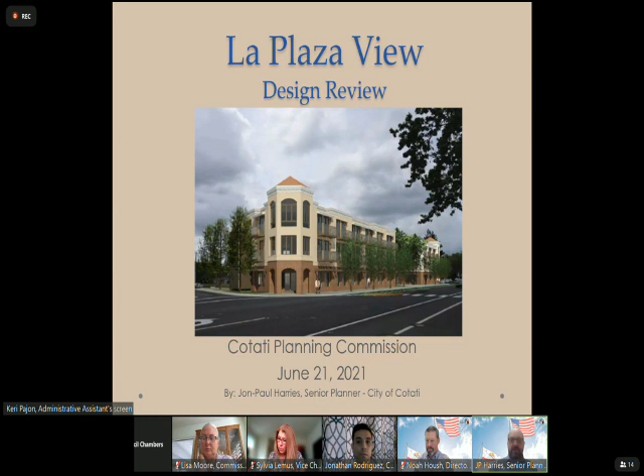The plans begin on packet page 50 if you want to review them as we go along. The project consists of 2 three-story mixed-use buildings, generally commercial on the ground floor and residential on the second and third floor. However, building 2 also includes some residential on the ground floor. Building 1, the more western of the two buildings, would have 6,992 square feet of commercial floor area, with 12 residential units: 10 two-bedroom and 2 one-bedroom units, 6 on each floor.

The building itself would be 35 feet high to the top of the parapet, and there's a tower at the corner of La Plaza and East Cotati, which also forms part of the roofline, reaching 43 feet tall at its peak.

Building 2, we're looking at 2 floor plans. Originally, the applicant proposed a floor plan with 1,271 square feet of commercial floor area and 17 units. We asked them to amend it, so that there's 3,391 square feet of commercial floor area and 15 units. 3 of those units would be on the lower floor; they were originally proposing 5 units on the lower floor. Like building 1, building 2 is 35 feet in height to the top of the parapet, 43 feet to the tower.

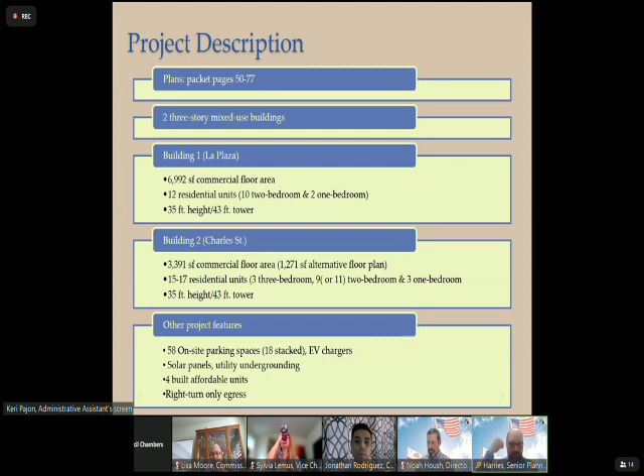Before we go on, let's just continue. Next slide, please.

Some background on this property, because some of this project will look familiar to some of you. The site's been vacant since 1965. In 2009, though not related to this project specifically, the City Council adopted the downtown specific plan in August of 2009, which established zoning and design requirements for the downtown area, calling for 2 to 3-story mixed-use development in this area.

The DSP establishes a building height limit of 35 feet. That's the maximum height, plus you're allowed to go 8 feet above that for things like towers, chimneys, or architectural features.

Following that, the general plan update was adopted in March of 2015. The general plan within the downtown area just reiterates the DSP goals and objectives and encourages development and revitalization of the downtown area.

This project originally came to us back in 2017, and it was a 2-story project back then with 12 residential units. Same kind of architectural design, 2 buildings, with the same mission commercial Main Street kind of look, but with only 6 units in each building.

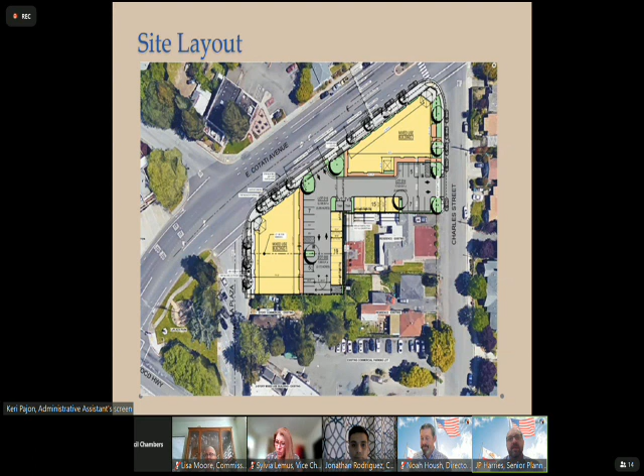Next slide. Here you can see the zoning. It is located within the DSP. It also has medium density residential around it, as well as downtown commercial.

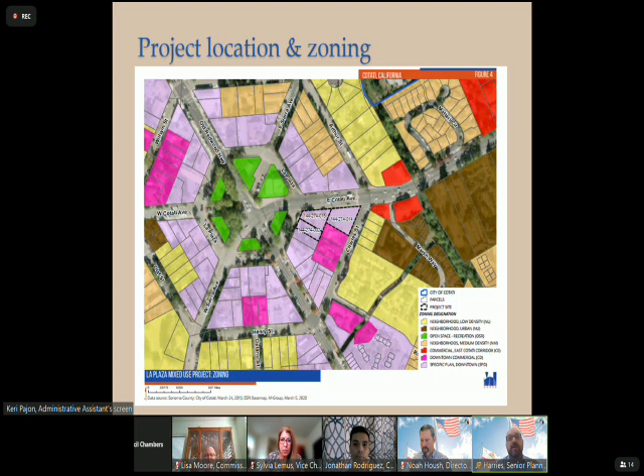Next slide. Some concepts about the Downtown Specific Plan, the DSP: the plan is to remodel, re-energize existing space, and create new space. These are the overarching goals, for the purpose of causing reinvestment in properties and generating a healthy, sustainable mix of uses around Cotati's historic core. The DSP provides architectural and development form rules, and I described some of its features on packet pages 22 through 28 of your printed packet.

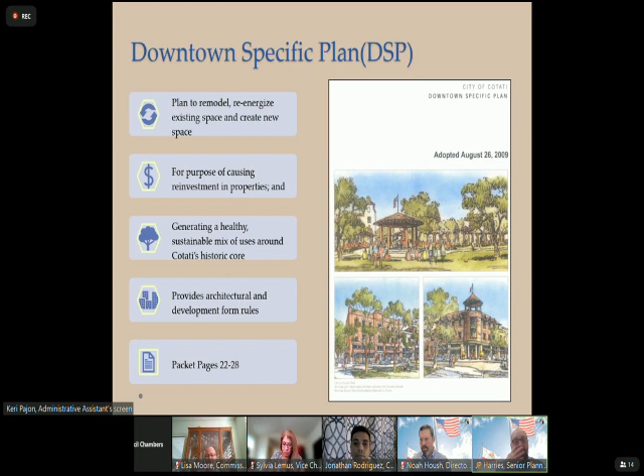Next slide. The DSP is divided into 4 different planning areas: the Historic Core, La Plaza, Commerce Avenue, and the Northern Gateway. La Plaza is pretty much the central zoning district within the hub.

The goals of the La Plaza district are to accommodate community-wide circulation while maintaining the village-scale context of the park area, to enhance public parking, enhance bike and pedestrian circulation and access, and reactivate the hub with housing and office above commercial development. It has various design standards: maximum height is 35 feet, with 0 setbacks, meaning the plan wants development right at the sidewalk. Parking is generally two spaces per unit, which is typical, though there's also an emphasis on shared parking, especially for mixed-use developments where you can share some parking. It allows for a variety of different design styles: commercial block, courtyards, duplex, triplexes, row houses.

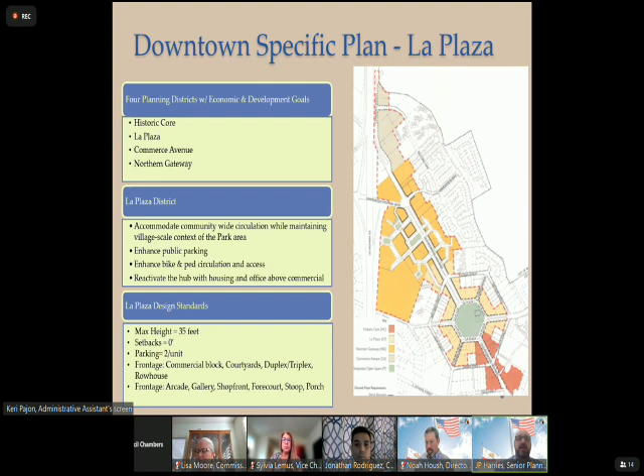Next slide. This slide tries to compare the two projects. One of them was approved in 2020, and I wanted to highlight some of the differences, because they look pretty similar.

First is the number of units: it was approved at 12 units, now the proposal is 27 units. They've done that primarily by adding a third floor. The third floor adds 5 feet to the building, to a maximum height of 35 feet.

The other structures similar to this would be Village Walks, right along the frontage of East Cotati, next to the Chevron station on East Cotati Avenue. Those are also 35 feet, or right at 34 with some inches. There's also some 3-story buildings of similar height on Santero Way, and the tower element of the Frog Song along Old Redwood Highway is at that height as well, 43 feet to the top of the tower.

So that's how they did it primarily. They added that extra floor and were able to capture a bunch more units, so much more efficient use of the actual space that's there.

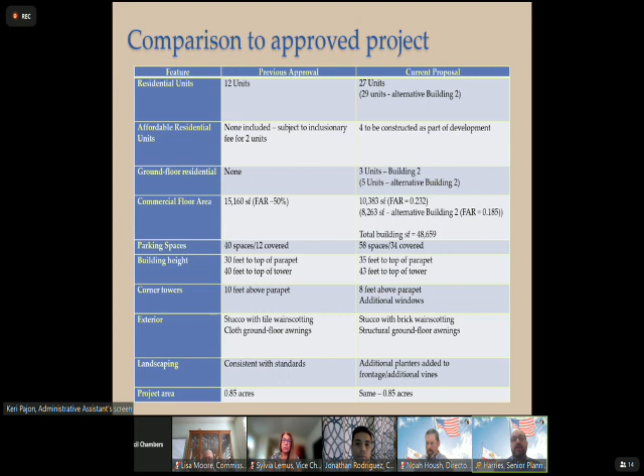For the CEQA environmental review, this project is exempt through a series of exemptions. One, it's consistent with the general plan and an adopted community plan EIR. There are different sections you can apply, and it's consistent with those. It also qualifies for an infill categorical exemption, so it's exempt from additional environmental review.

There's been quite a bit of examination of this property, with very little change from what you reviewed and approved in 2020. In fact, one interesting thing is that because of the reduction in commercial floor area, traffic is actually less, even though you're adding units. Retail and commercial generates more traffic per square footage than housing does, so we're actually generating less trips per day with either proposal today than what was approved just a year ago. That's really the only major change in terms of environmental impact, and it gets better.

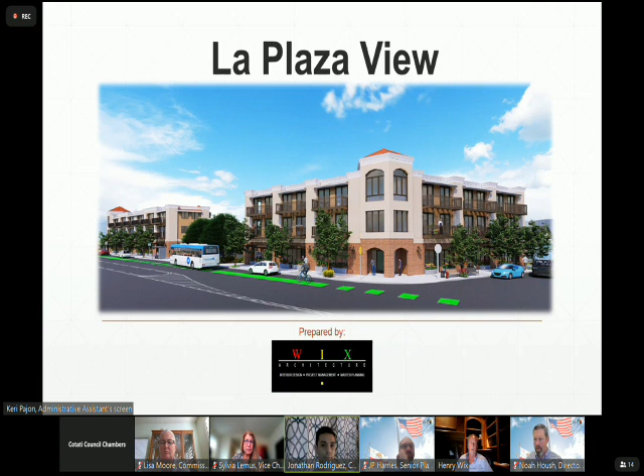The lead-in slide gives you good context of the overall project, showing both buildings in the same shot. You can see the designated green bike lane in front of the project. We're relocating the bus stop from about where the blue car is on the right side to just west of building number 2, and it's a much more urban and understated bus stop. I'll leave it at that. Next slide, please.

This gives a little more focused context. You can see the existing site is vacant, and north is unfortunately pointing south, which we inherited. But the right side shows it in the context of where it's located next to the fire station, the church, and a senior housing project to the east and south a little bit. Next slide, please.

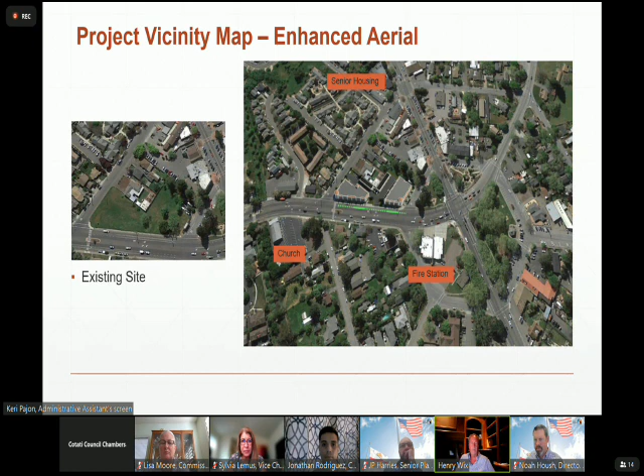So John Paul's pretty much covered the majority of the highlights already. Adding to some of the nuts and bolts...

We're going to propose at least 25% e-charging stations, and we're allowed to do that easier because of that parking garage, which has the ability to add those charging stations probably where they're needed most, because I think the upper level will pretty much be dedicated to the residential units. We'll have solar panel systems on that carport as well as on the roofs.

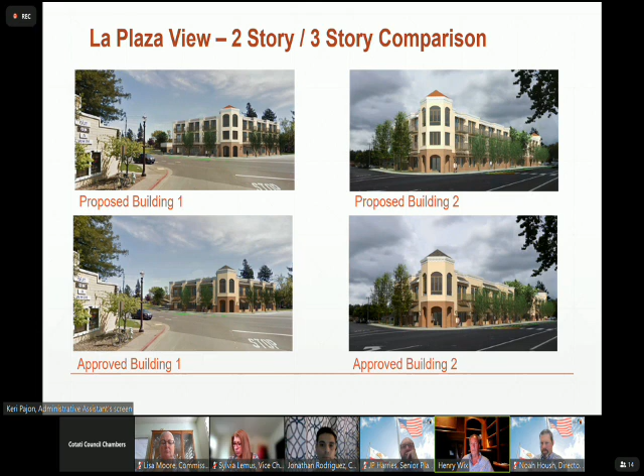I call this transitional style architecture, and I think the basic form is better with a podium level clad in brick, with the upper level having 2 levels rather than 1. It had some awkwardness to the design, not having multiple floors above it. If you look at traditional architecture, you'll see what I mean, and I hope you concur that this is a better looking project. Next slide, please.

So here's a big part of what we're asking for tonight, in Building 2. What we heard when we brought it to you 14 months ago, both from a planning commissioner and from the public, was about the viability of that retail space in building number 2, being remote-ish from the square. So we worked with staff and got a little bit of a green light without looking at the detail, and that's not a fault of staff in any way.

We designed it in such a way that we would have 5 units on the lower level, shown on the right-hand side, and then got the call a little after our application that we didn't comply with certain parts of the zoning code and a little bit of the DSP as well. So the simple solution was to remove 2 units, which got us back into that ratio of having 50%

and 100% commercial fronting along East Cotati. If we added 2 units back on the right-hand side, we would still comply with the DSP of having a 50% ratio of storefront to street frontage. We wouldn't quite make the commercial, but I think this is a better solution, and 2 additional units to the housing inventory is very well worth the potential of having vacant commercial retail space on the lower level. Next slide, please.

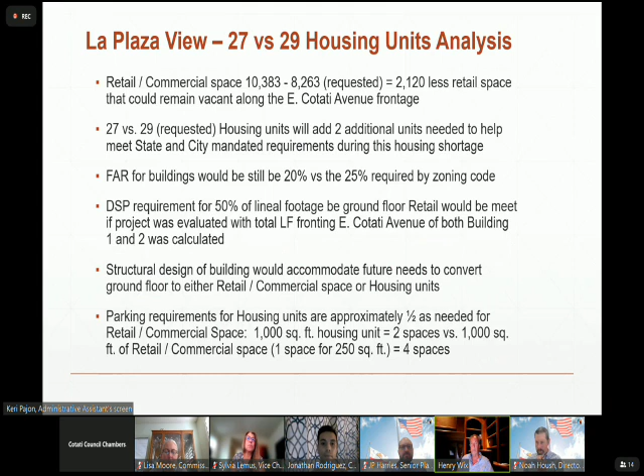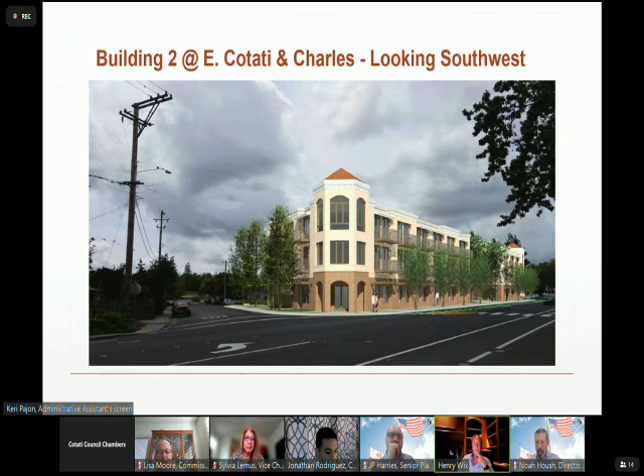Again, some of the elements are repeated from building 1 to building 2 to create a cohesive design connection between the two buildings.

Along East Cotati, there is an exit stair required for egress from floors 2 and 3, and we're proposing to do a wire mesh system with a vine system on it, which adds some greenery that softens it into the building.

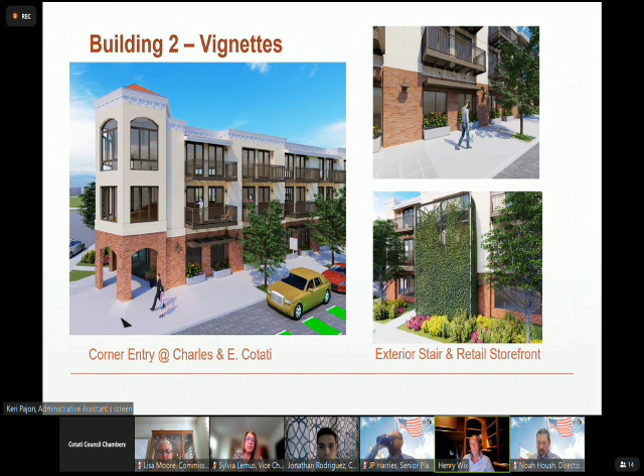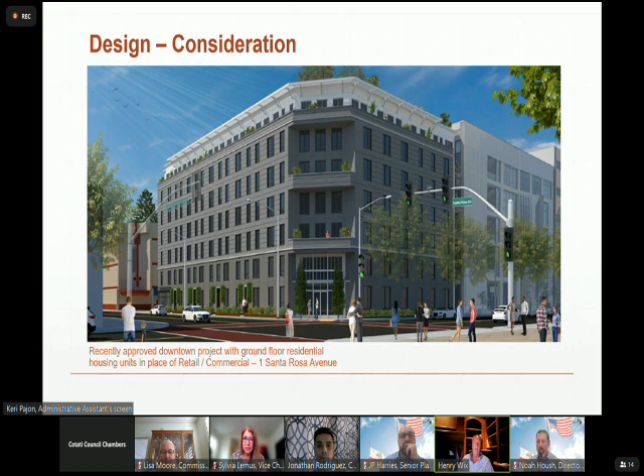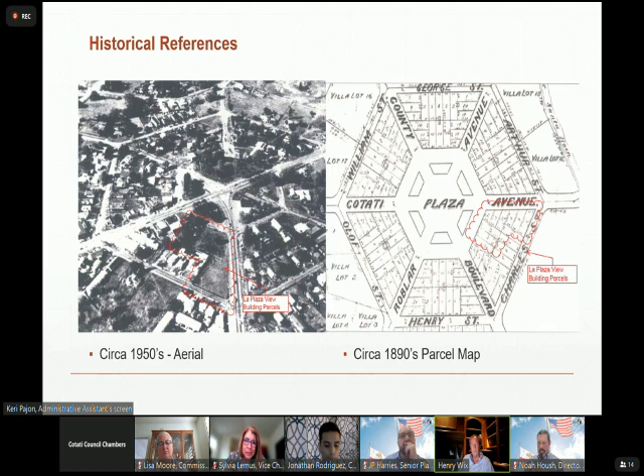Our building number 1 would front any of these options. Next slide, please.

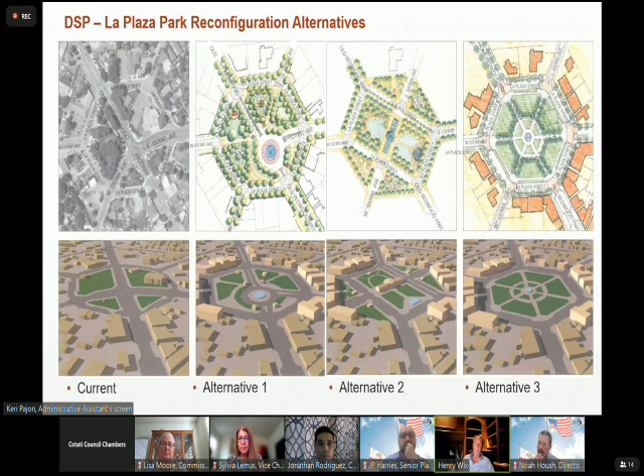So taking that from the last option, this is a fully reunited square, and we did design the project on the plaza to be set back in that configuration. I had a pointer to show you where our project is, but it's on the right-hand side of the first image, and it's got kind of a U shape to it. Anyway, the La Plaza would be developed as back-in parking, and in this scenario we've respected this potential future development and reunification of the plaza.

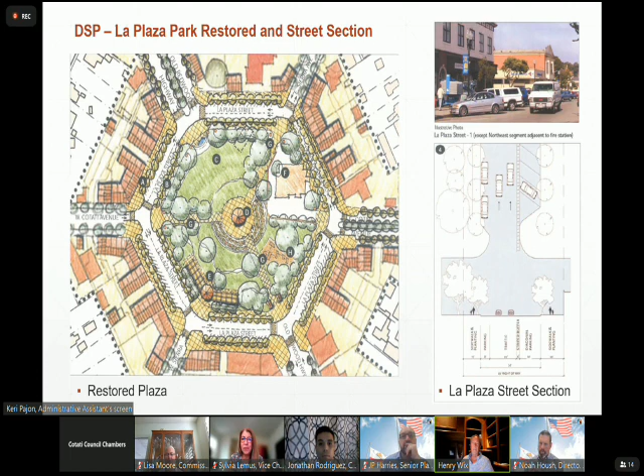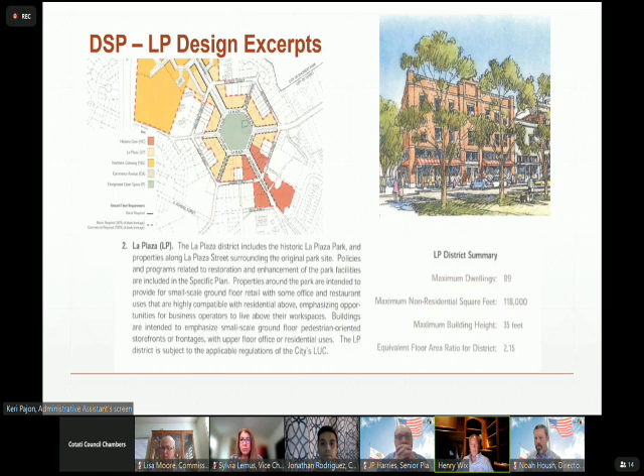A fairly small zone by comparison to a couple of the others, but a couple of highlights we've had to follow in our guidelines: the maximum height of 35 feet, and the equivalent floor area ratio for the district is 2.15. We're at 1.19 floor area ratio for our current proposal, and we were well under 1 before. So we're getting closer to what the LP district envisioned for floor area ratio, but due to some slight constraints, we couldn't get much higher. Next slide.

These are a couple of excerpts directly from the DSP showing examples of the shop front, and that was the style of architecture we selected.

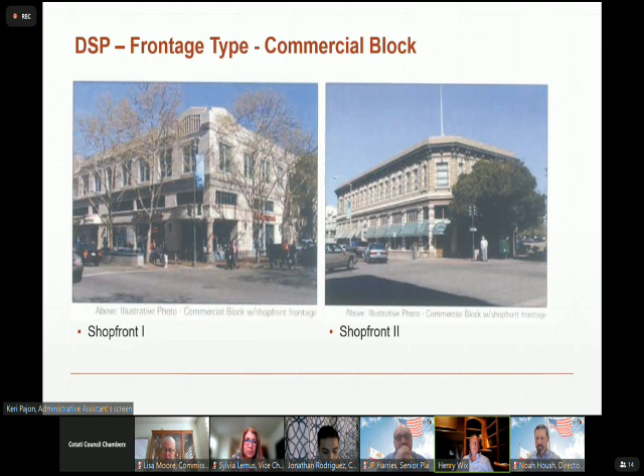Again, on Main Street, if you squint your eyes, you can see a blending of the Main Street commercial and the Mission Revival styles, really anchored by our towers, both on Charles and on the corners of La Plaza, while creating a strong base. You can see in both the bottom elements that they have fairly strong bases with 2 stories of either residential or commercial above them. Next slide.

Time frame: mostly for the first application you saw before, we've done a lot of studies, a lot of plans, over 4.5 years. Hopefully we'll stop at this point and respectfully request the 3-story design you're seeing before you be approved. Next slide.

So that's pretty much the end of my presentation. I'd love to have any kind of dialogue, any questions you have. I kind of breezed through a few of the slides and I'm open to answering any of your questions.

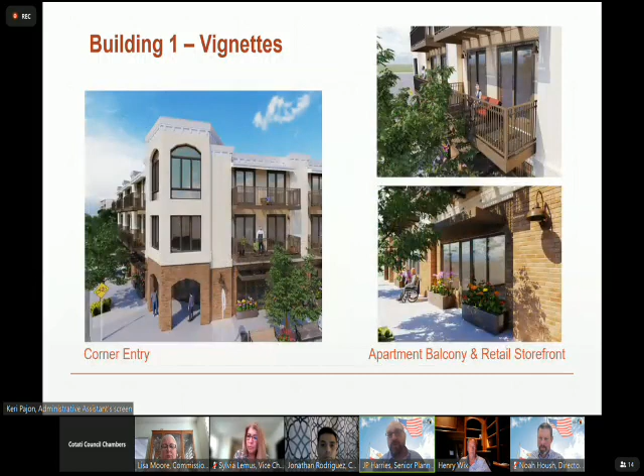If you look at the different floor plans, or could go back a few slides on this particular view, we could look at those side by side. That was our request, that he remove those 2 units, so that we could get closer to what the DSP calls for, which is pretty much 100% commercial frontage, and also get the floor area ratio of commercial to residential up higher, closer to 25%.

Right there, stop please. Okay. So this is the ground floor of building 2 that you're looking at, two different floor plans. The one on the left includes the more commercial space. It just isn't showing how it might be divided up into different units, but all of that would be the commercial space up there.

And then on the one on the right, you can see the 5 units. So those are the two differences between what we're recommending, what the applicant actually applied for, and what they're requesting the planning commission move forward with.

Retail space is limited. I think the markets go up and down, and at times there's more vacancies, at times there's less. I will just leave it at that. The DSP calls for that to be commercial frontage along East Cotati. It doesn't have that same requirement for Charles Street.

Our mixed use rules try to get the amount of commercial, or try to make sure that the residential doesn't exceed 75% of a building's floor area, if that makes sense. Hopefully it did. But a quarter of it can be commercial is basically what we're trying to target. Okay, yeah, those were my questions.

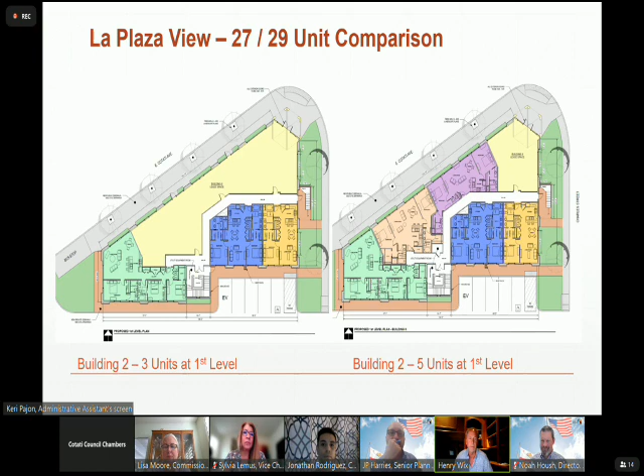May I interject a little bit to help clarify your question about the street section at East Cotati? Sure. If I could get to go back a couple of slides to the site plan. Perfect. No, there you go. Maybe the text is too small, but...

Then there'll be a 9-foot designated parallel parking spot for where it does conflict with the bus stop. At the bus stop, you can see a flare, a dashed line flaring from the tree on the right-hand side to just at the in and out of the roadway off of East Cotati. There's another flare there. So that's a no park zone already designated.

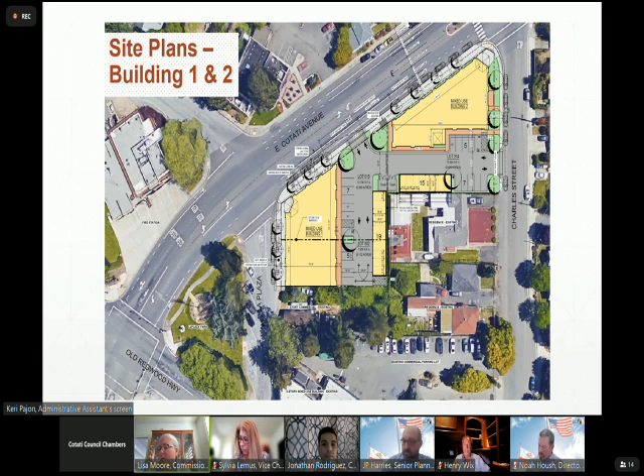All right, thank you. I don't have any other questions, Sylvia, but I would like to talk about, as the commission, whether we want 27 or 29 residences. I'm leaning towards 27 just because I know the retail portion of Cotati is only going to be ramping up. We walk frequently downtown and I don't see a lot of vacancies right now. But that's the one point that I think we need to talk about as a commission.

Okay, so we have two proposals: the 27 unit and the 29 unit. Staff recommends the 27 unit.

So I'll go to the commission to ask if they have any questions or concerns between 27 or 29 units. Commissioner Rodriguez? I prefer the 29.

I understand the market goes up and down, and you can't really predict retail and anything like that. But I think having more housing is more beneficial, in my opinion.

Now, I know Commissioner Moore had asked an important question we didn't have the answer to, which was the percentage of retail vacancy. I don't know if that information would make a difference to any of the commissioners, or if we could make a decision today based on what we know and see. Commissioner Moore mentioned she walks around and sees that there's not a lot of vacancy, that it seems to be full.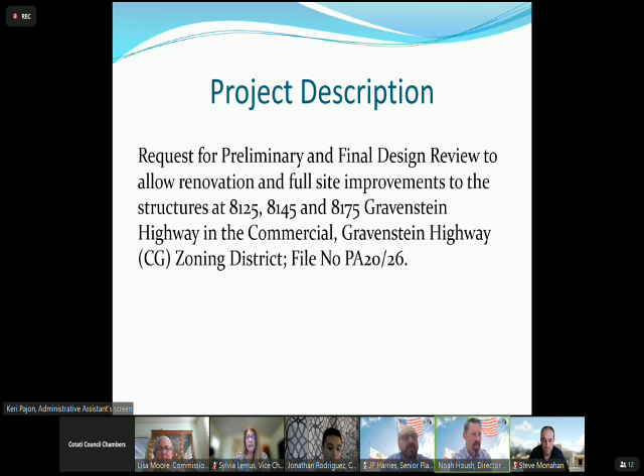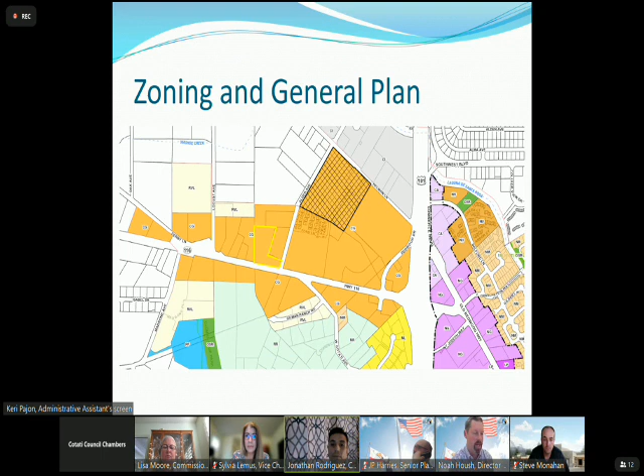Similarly, this slide just provides some context. The entire Highway 116 corridor west of 101 is in the Commercial Gravenstein Highway zoning district. Keri, if you just advance the slide once, it'll highlight the parcel there, just showing some context, identifying where the property is. But again, remember, this is just a portion of the site that's proposed for development.

So background, there's more background in the staff report, but I just wanted to highlight that this project, similar to some of our projects in town, has been trying to move forward in various forms for several years. In October of 2016, an application was filed to redevelop the whole site with a retail building on the frontage and then a 125-unit assisted living facility on the remaining northern portion of the site.

In June of 2018, the applicant was granted approval to operate a commercial cannabis retail facility from the site, and at that time it was assumed that it would be from the newly built retail building. In October of 2019, the City Council granted the final entitlement for that project. In September of 2020, staff issued building permits to allow the repair of those buildings. No design changes were approved, but it allowed the applicant to move forward and begin repairs as they put together their design package. They filed design review to renovate those existing buildings, and that's the project before this evening.

In the meantime, in April of this year, the council granted an extension to that approved cannabis retail permit, contingent on approval of design review by the Planning Commission. Of course, nothing in this summary identifies the impacts of the COVID-19 emergency declaration or its impact on commercial project financing or economic viability, which obviously has played a large part in the decisions on the applicant's part, as well as our response to it. It also does not discuss the significant conversations and coordination between staff and the applicant to get the project to this place, just to provide a little bit more context.

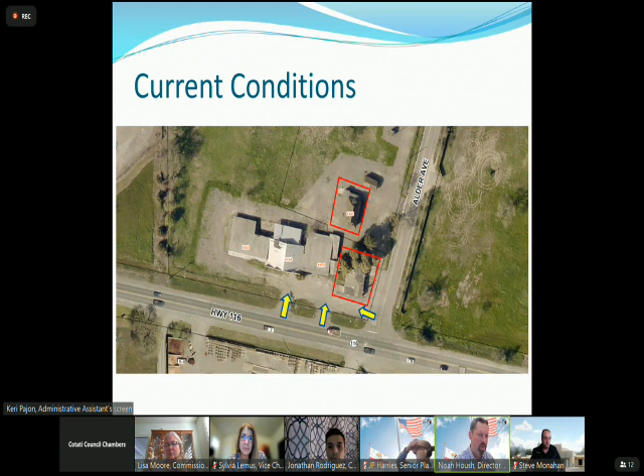That condition was really to address a safety issue. The 2 ingress points on Highway 116 as well as Alder Avenue are none of them compliant with city standards. Putting multiple ingress and egress points onto the highway as folks accelerate out of town is not compliant with any established standard, and also the location of the front driveway on Alder is too close to that intersection. So all those were issues we asked the applicants to resolve through their design work.

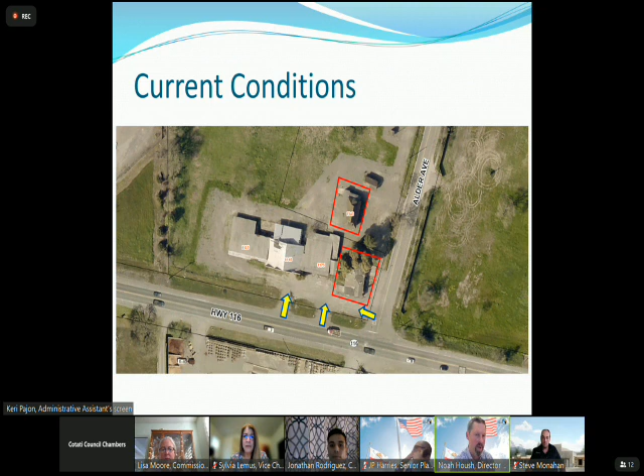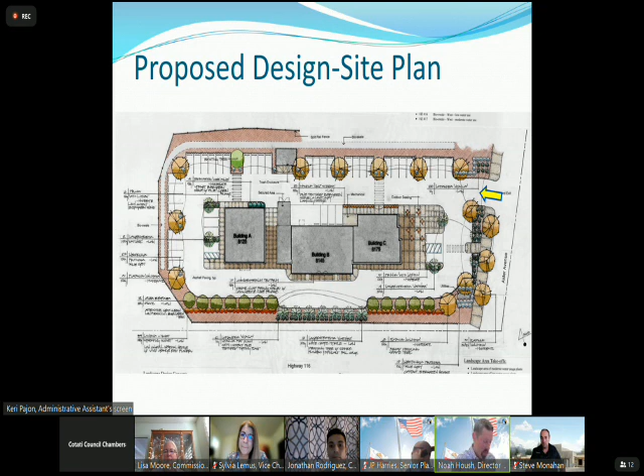As mentioned in the zoning analysis, the parking is actually overparked based on the retail complex parking standards, and generally our staff will never ask that a project exceed the parking requirements. However, in this situation, given that we don't know the actual uses and demands for those adjacent spaces - the 2 commercial spaces that could come in as a restaurant, utilizing a lot of outdoor seating, would bump up the parking demand - and as that northern site develops, there may be some reciprocal benefits from having a few extra parking spaces. So staff is supportive of that.

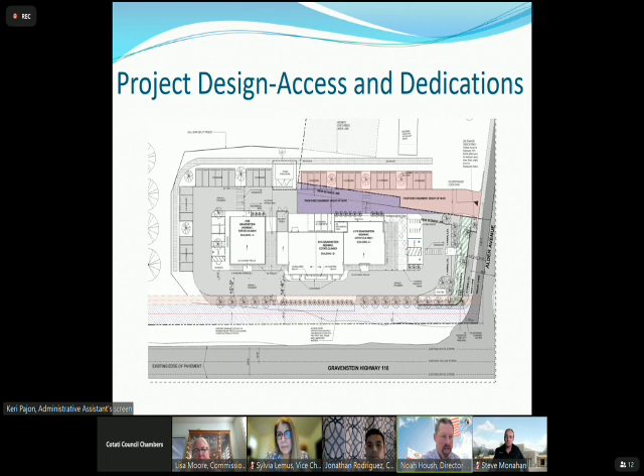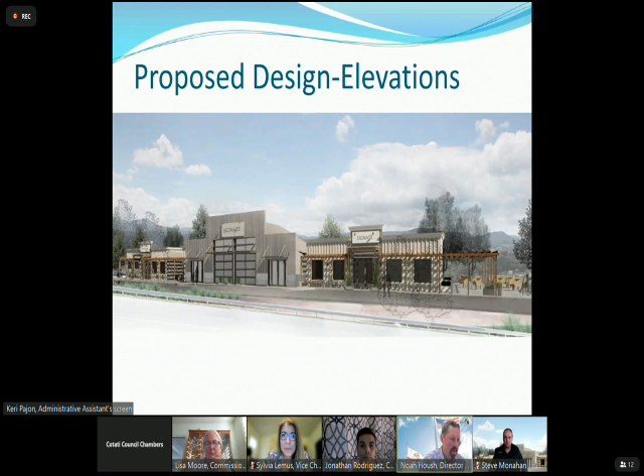So just jumping into the analysis portion as identified in the staff report. So the project, the existing conditions, as we've talked about, the site is fairly dilapidated and has been the site of numerous challenges, both for the applicant and for the city.

It's a 3.13 acre parcel. The buildings have definitely been underutilized. They've been vacant for at least the last 2 years, and I think closer to 4 years, given when I know Red's closed, and I'm not sure when the other buildings have been most recently occupied.

The purpose of design review in Cotati is to ensure that the design of the development and new uses maintain and enhance the city's small town character, ensure new uses and structures are compatible with the highest standards of improvement in the surrounding neighborhood, retain and strengthen the visual quality and attractive character of the community, ensure that these new structures and site planning promote energy conservation, ensure that the proposed landscaping emphasizes native species, and recognize the interdependence of land uses and circulation for an efficient interconnected system of streets and pedestrian ways.

The goal of design review was also to assist the developers in understanding the city's concerns for aesthetics and development, and then also ensure that that development complies with all city standards. As identified in the staff report, staff is supportive of the design and finds that it's consistent with all the purposes of design review.

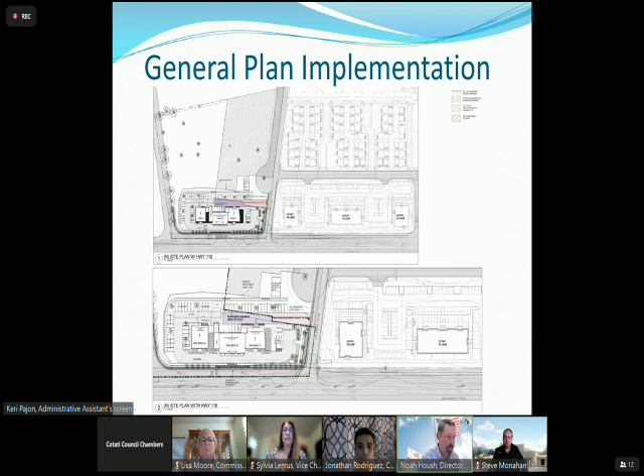So with that, we'll go to the next slide, which is the recommendation. It is recommended by the Community Development Department that the Planning Commission adopt a resolution approving preliminary and final design review to allow the complete renovation and construction of full site improvements for the structures at 8125, 8145, and 8175 Gravenstein Highway in the CG zoning district.

The applicant, Mr. Steve Monahan, is here and has a brief presentation to give as well. If the commission would like to hold out for questions, in case he may answer.

Good evening, Commissioners. Thank you for your time this evening.

I had a presentation that I sent in earlier today. I don't know if it's possible to pull that up on everyone's screen, please. Wonderful. Okay, if you would advance the slide, please. One moment, please. One moment, please. Got it. Thank you, Keri.

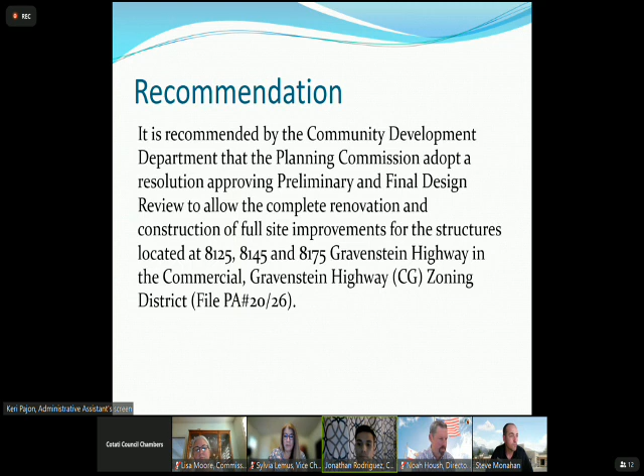Sorry about the dogs in the background.

Well, again, thank you so much for the opportunity to be here this evening. This proposed project is a redevelopment and improvement of existing structures at the corner of Highway 116 and Alder Avenue. This project enhances the western approach to Cotati and will feature substantially upgraded landscaping throughout the project, especially at the corner of Highway 116 and Alder. We'll be improving the building facades, adding new windows, and substantially enhancing the overall condition of the site. We are bringing a neighborhood-oriented commercial center to the western end of Cotati.

The goal is to move an approved dispensary project into the middle building, which we call Building B. We've been working with a local Cotati resident who has a bakery, and we are in final negotiations of our lease with her presently, and she'll be moving into the westernmost building, which we call Building A. We are actively searching for a third tenant in the easternmost building, which we call Building C.

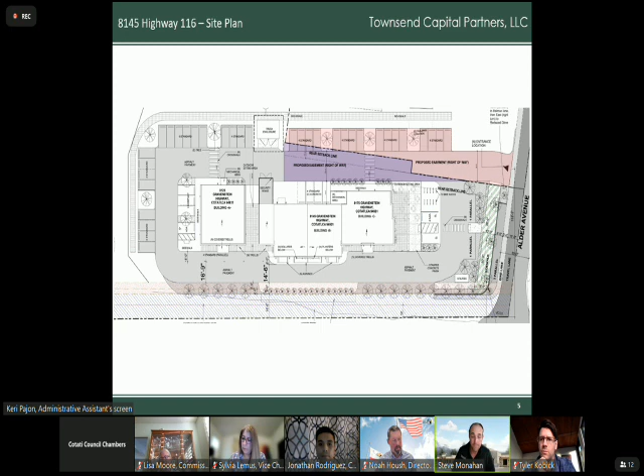Next slide, please. This is just a slightly different perspective, same plan, but more of a landscaping focus. As you can see, there's a lot of trees and a lot of shrubbery and additional enhancements that we believe are going to really make this place look great.

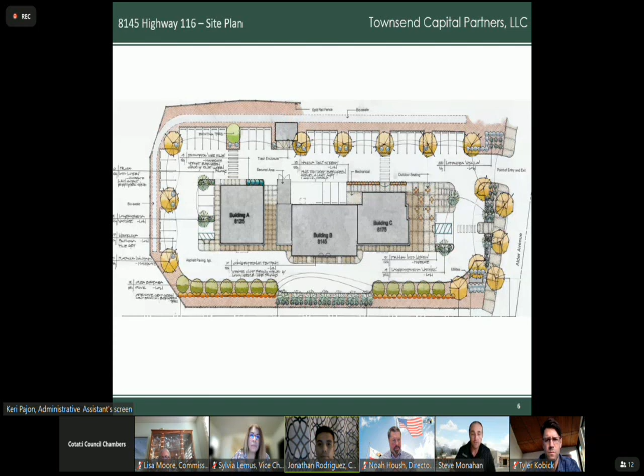Next slide, please. So I'm going to hand this off to Tyler Kobick, who's our architect, and let him talk about the design elements of the project.

Hi, Commissioners. Thank you for your time tonight. Can everybody hear me all right? Yeah. Yes.

And Noah, thank you for the presentation. Appreciate your help tonight, but also over the last 6 months working with us to refine this design and get us to the place where we are now.

A little bit about the aesthetics of what we're looking at and what we've been doing to develop this site has a lot to do with how you take on adaptive historic reuse and make something that honors the tradition where it's come from, and also adds new elements that give it character and give it some new language.

We've taken a lot of cues on this project from the center building, which was kind of the building of highest quality on the site that pre-exists today, and probably was maybe even of higher quality than Red's Recovery Room. The building has a concrete stem wall, and it has a story and a half, nice built barn space with steel trusses, and it has some nice historic agrarian character to it.

And so first and foremost, what we did on the project was to bring, we wanted to create some symmetry around the center structure and to allow the eye and the retail experience to center around that building, which is the largest structure and the most significant on the property.

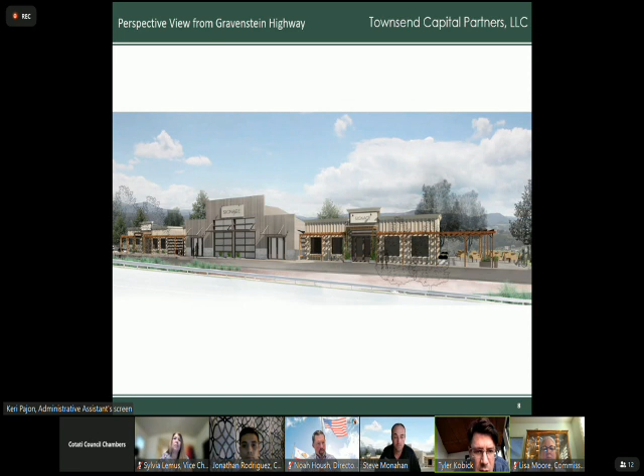Do you have any more slides there, Steve? I think we do. This gives a closer perspective of how we envision these entry sequences and some shade spaces, hopefully not creating an extremely formal pergola strip mall feel.

We didn't want to be completely—we looked around at some surrounding structures to the east and west, and wanted to avoid a strip mall feeling, but still give some entry sequencing that brought the scale down and brought the human experience toward the entry of all three buildings. That's what we're seeking with the pergolas and the transition space between the asphalt drive surround and the buildings themselves, giving them more humility and character to encourage pedestrian access and usability.

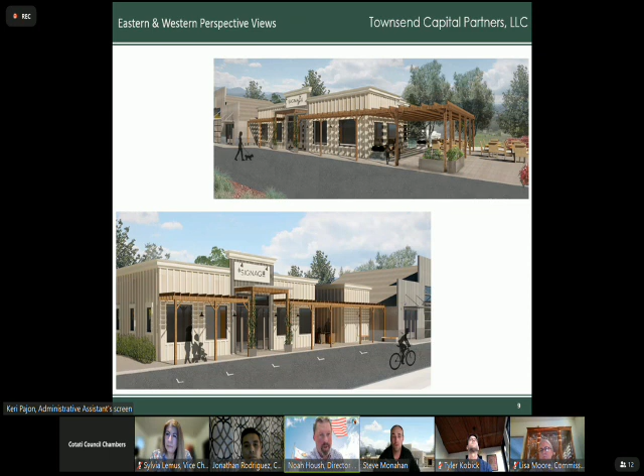Okay, yeah, so I will add—part of the decision here is a redwood tree being removed and a very small oak tree being removed that's in really poor health. It was located between the Reds building and one of the other existing buildings, building C I think, the easternmost building. Both need to come out given their combination of poor health and the need to move the driveway. The city council did see this site plan when they reviewed the cannabis permit, and the applicant has not only preserved the trees they could on site, including one of the oaks that's going in one of the orchard parking planting areas, but also has essentially doubled the size of all the landscape trees being planted as compensation for that. Okay, thank you.

Thank you, and now we'll go to Commissioner Moore for any final comments or questions. I don't have any questions, but I do like the name that it's Reds. It's historic in Cotati that everybody has basically drank at Reds at one time or multiple times.

I love the idea that we have another dispensary coming in along with a bakery, since one of our bakeries just left Cotati. So I think it's a good project. It fits in that neighborhood since we have another dispensary right down the road. I like the design. I think the middle building could be a little softer. I'm not so much into the industrial thing, but I can let that go.

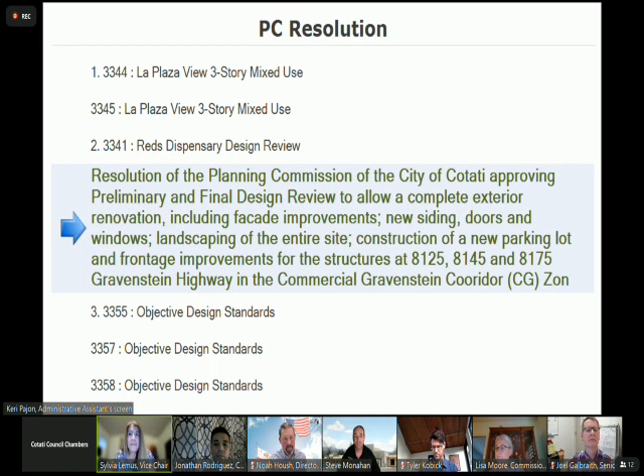Okay, now we'll move on to the next topic. The next one is proposed multifamily objective design standards, amendments to the multifamily open space standards, and proposed telecommunication and small cell design guidelines.

So that's for a staff report on this? Yes, Joel Galbraith, Senior Planner. The item before you is the Objective Design Standards and Telecommunications Small Cell Design Guidelines. Next slide, please.

To give you some background, in 2018, Senate Bill 35, a state law, went into effect and requires a streamlining of qualifying multifamily projects. On these types of projects, only a building permit is required, subject to it meeting the objective design standards, as well as any other city objective standards. What are the benefits? It provides clarity for residential developers and applicants, provides more certainty for project approval, and provides increased clarity for residents about the type of development that could occur in their neighborhoods. Next slide, please.

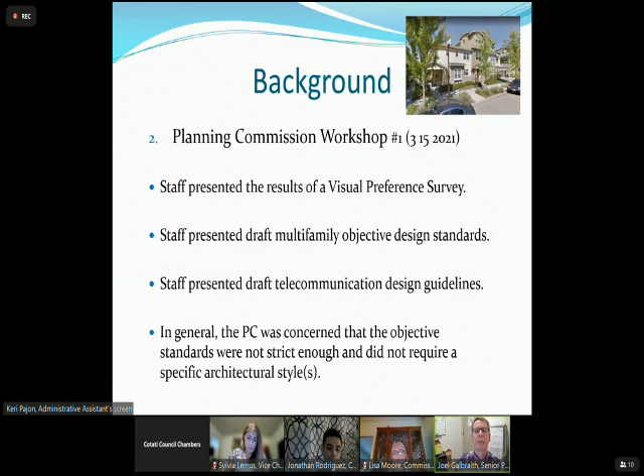The Planning Commission conducted a workshop on this item back in March of this year. At the workshop, staff presented the results of a visual preference survey, draft multifamily objective design standards, and draft telecommunication design guidelines. In general, the Planning Commission was concerned that the objective design standards were not strict enough and did not require a specific architectural style. Next slide, please.

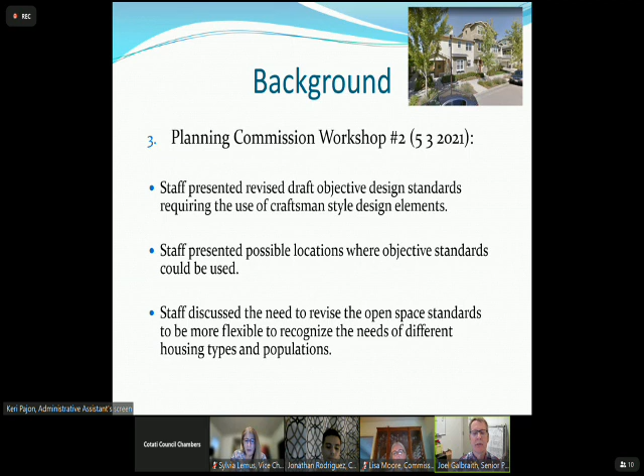In May of this year, the Planning Commission conducted a second workshop on this item. At that workshop, staff presented revised draft objective design standards requiring the use of craftsman-style design elements, possible locations where objective standards could be used, and discussed the need to revise the open space standards to be more flexible to recognize the needs of different housing types and populations. Next slide, please.

So by law, Cotati must provide a by-right residential development option. Applicants can still request different standards; if so, then the applicant must go through Cotati's typical discretionary design review process.

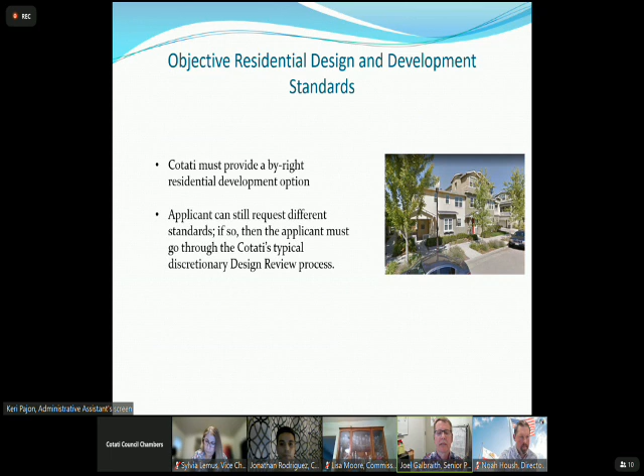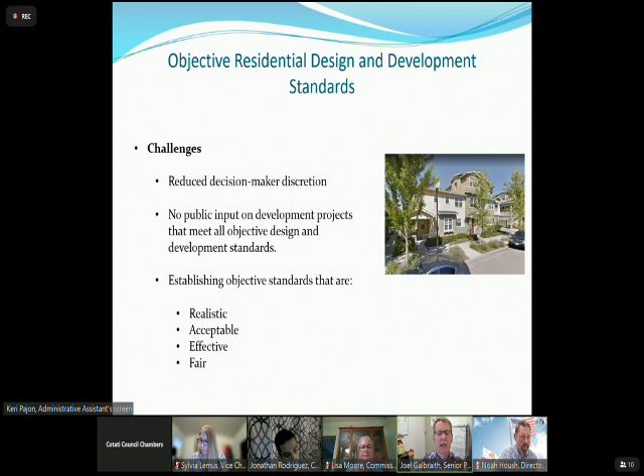Next slide. The challenges with the process are that it does reduce decision maker discretion, there's no public input on development projects that meet all objective design and development standards, and establishing objective standards that are realistic, acceptable, effective, and fair is also a challenge. Next slide.

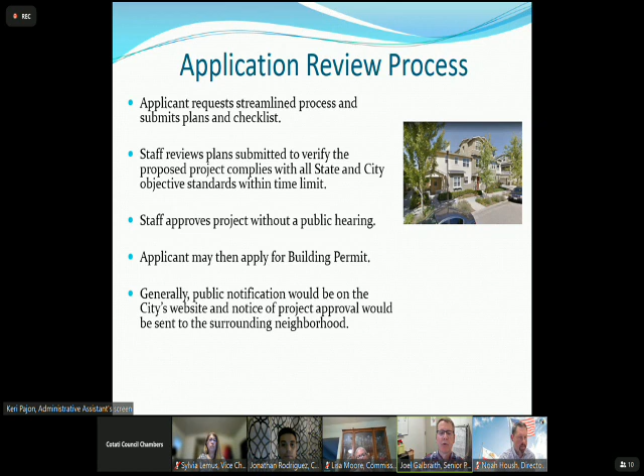Next, the review process: how a city would review a project that comes in using these standards. The applicant requests the process and submits plans and a checklist. Staff reviews the plans submitted to verify the project proposed meets all the state and city standards within a certain time limit, and staff approves the project without a public hearing. The applicant may then apply for a building permit. Generally, public notification would be on the city's website, and a notice of project approval would be sent to the surrounding neighborhood.

Now I'll go over the proposed amendments included in the resolution. Most of these we saw at the second workshop, and these are basically the same ones, except I'll talk more about the open space standards.

Under building design, craftsman style is required. Four-sided architecture is required. If the building is facing a street, units on the ground floor would need front entry porches with a minimum size of 6 by 8 feet.

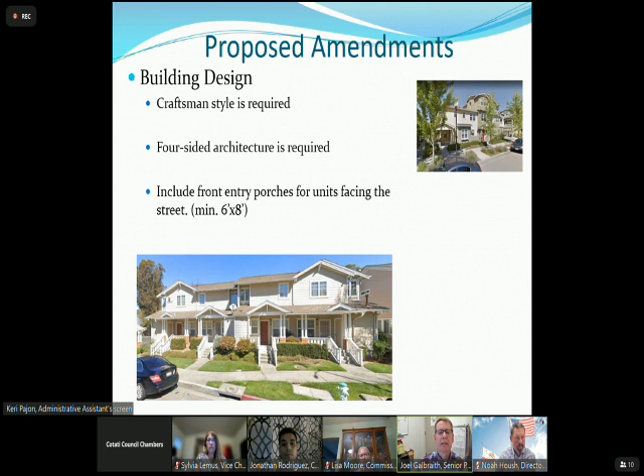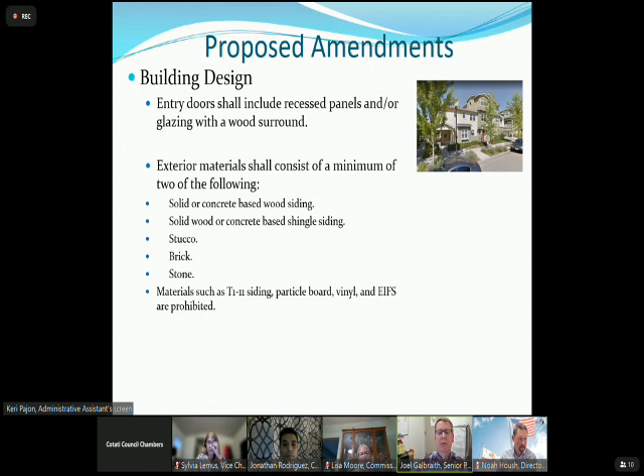Under building design, entry doors shall include recessed panels and/or glazing with a wood surround. For building materials, they need to choose at least two of the following: solid or concrete-based wood siding, solid wood or concrete-based shingle siding, stucco, brick, stone. Materials such as T1-11 siding, particle board, vinyl, and EIFS are prohibited.

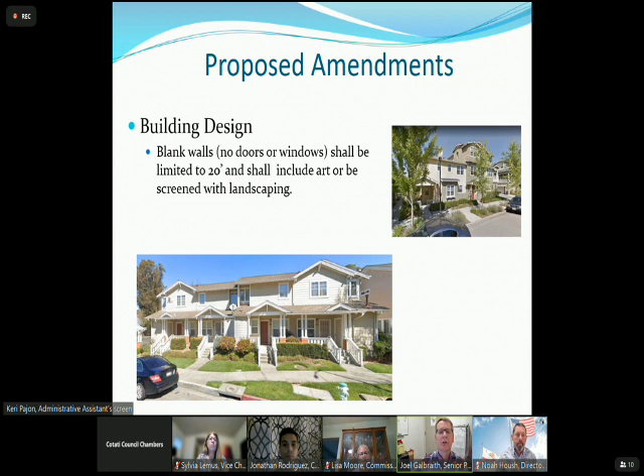Under massing and articulation, the building needs to include features such as balconies, bay windows, and individualized entries that break up the building. There need to be offsets every 50 feet in the building, with an offset of at least 18 inches, and the roofline needs to vary at least every 50 feet.

These are the proposed open space standards. At the previous meeting, we discussed the concept of providing usable open space with various types of open space, but at that time staff did not have specific standards. These are the proposed standards included in the ordinance before you.

Under the proposal, each dwelling unit would need a minimum total of 150 square feet — that's 150 square feet total of a combination of private and common open space. However, for projects next to a park, across the street or adjacent to a park, they only need 48 square feet of open space total.

There are three types of open space. One is private open space specific to a unit, which can be a private entry porch or private patio garden — if you're on a ground floor unit, you need to include one of those with your project. The other type of private open space is a private balcony, for an upper floor unit. Private balconies are never required, so the ordinance allows the applicant to choose it, but it's not a requirement for any of the units to include a balcony.

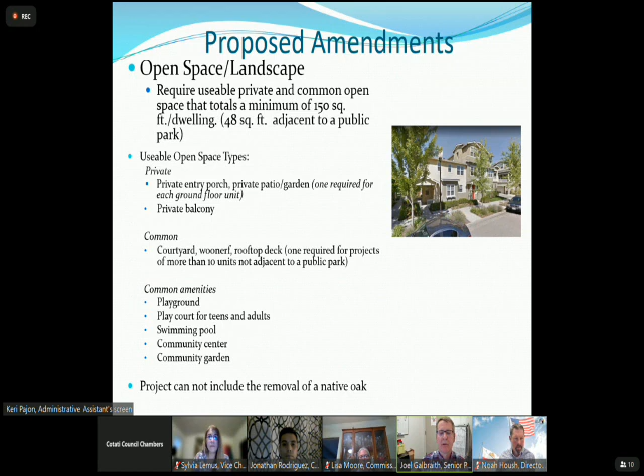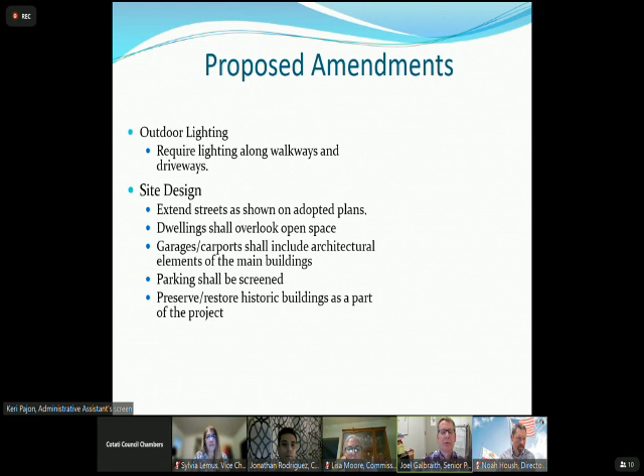Next slide, please. These are the additional amendments proposed, basically the same as you've seen at the previous workshops. Outdoor lighting is required along walkways and driveways. Regarding site design, streets are required to be extended if they're shown on adopted plans. Open space should be overlooked by dwellings to provide defensible space. Garages and carports shall include architectural elements of the main building. Parking shall be screened, and historic buildings should be restored as part of the project.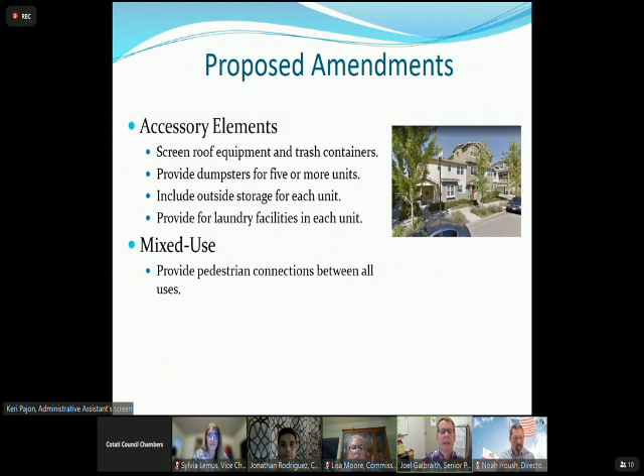Next slide. Regarding accessory elements, these are similar to what you've seen before: screen roof equipment and trash containers, provide dumpsters for 5 or more units, include outside storage for each unit, provide laundry facilities in each unit, and for mixed use, provide pedestrian connections between all uses.

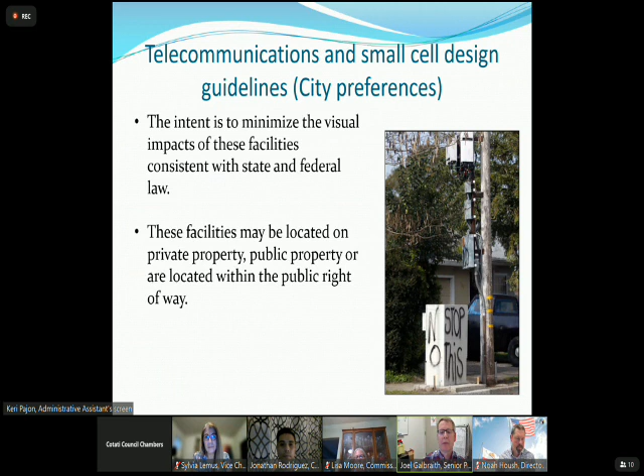Next slide. We'll move on to the telecommunication and small cell design guidelines. These are guidelines, not requirements — they are the city's preferences. The intent is to minimize the visual impacts of these facilities consistent with state and federal law. These facilities may be located on private property, public property, or within the public right-of-way. Next slide.

Regarding guidelines for standards for facilities located on private and public property, outside the public right-of-way: locate the facility to minimize impact on scenic qualities and blend into the surrounding environment by integrating into common site features.

If you look at the examples to the right, the tower shows a facility that is not screened or integrated. To the right, we show examples of how these facilities can be integrated into common features such as steeples, religious symbols at churches, and within artwork.

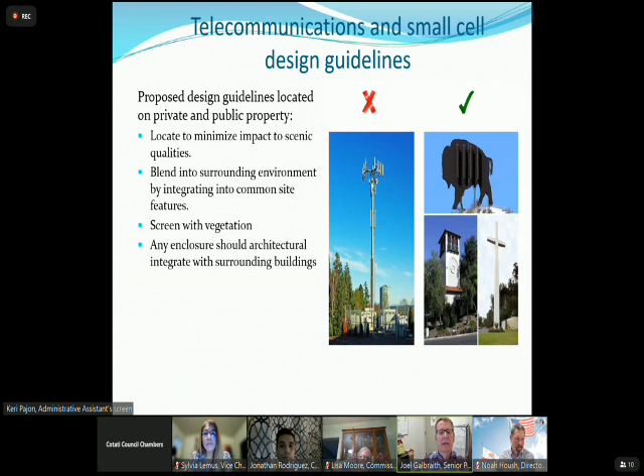Also, these can be screened with vegetation if possible, or the appearance minimized with vegetation. Any equipment or fencing around the equipment should be integrated with surrounding buildings.

Next slide. Regarding telecommunications and small cells in the public right-of-way, typically these are on wooden poles, in Cotati these would be PG&E poles. The goal is to not locate these facilities directly in front of a residence or other habitable buildings, and keep them away from street corners by at least 50 feet.

Where possible, screen with vegetation. Equipment on the pole should be neutral in color or match the color of the pole.

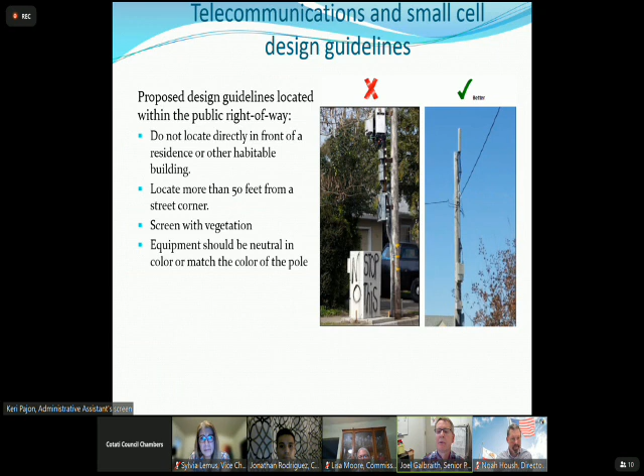In the examples to the right, you see a facility located near the ground that does not match the color of the pole. A better example is on a wooden pole where the facilities are higher up, out of view of pedestrians and drivers, and the equipment matches the color of the pole.

Next slide, please. These are examples of facilities on street lights. The goal is that the antenna and equipment should be flush with the pole and incorporate a stealth design. The example at the top shows a street light where the equipment matches the color of the pole and is designed to incorporate the design of the pole.

The example at the bottom would not meet the standards, because it's basically equipment that's just tacked onto the pole and not designed to integrate with it or be of a stealth design.

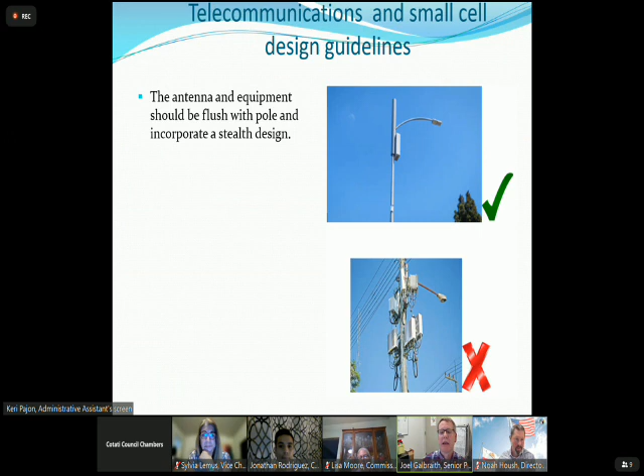Next slide. This has to do with ground-mounted equipment, which these facilities often include. The ground-mounted equipment should be located behind the sidewalk and screened or underground. When these boxes are visible, the utility should participate in the utility box public art project.

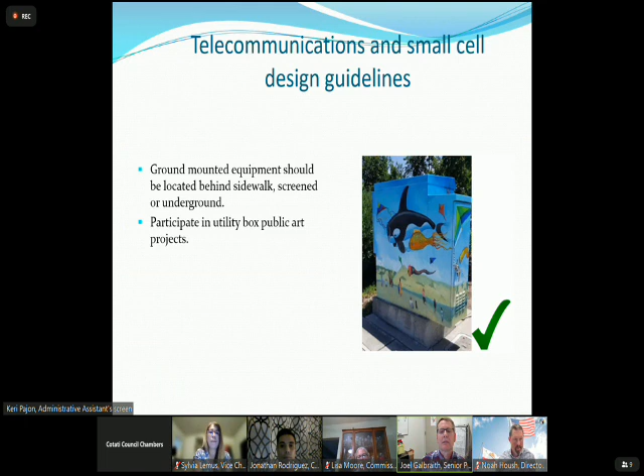Next slide. This is the end of the presentation, so this is staff's recommendation. Staff recommends that the Planning Commission conduct a public hearing and adopt resolutions recommending that the City Council amend the Land Use Code to adopt multifamily objective design standards, amend the open space standards for multifamily housing projects, and adopt a resolution recommending that the City Council adopt telecommunication and small cell design guidelines.

Next slide. And that concludes staff's presentation. Any questions of staff at this time?

I have a question of commissioners and of staff. Was anyone wanting a 5-minute break before we continue on, or should we continue? I meant to stop before and ask that question in between presentations, and I failed to do that. What is the feeling of commissioners and staff about taking a 5-minute break?

It's fine, I'd rather just keep going. I can keep going too. Okay, me too. Okay, so then we'll go to questions.

Commissioner Rodriguez, any questions? I don't really have any questions, just a comment that these standard designs are very important, especially with SB 35. At least we have some control about how the design will look and incorporate into the way Cotati feels and looks. So that's all my comments. Okay, thank you. Commissioner Moore?

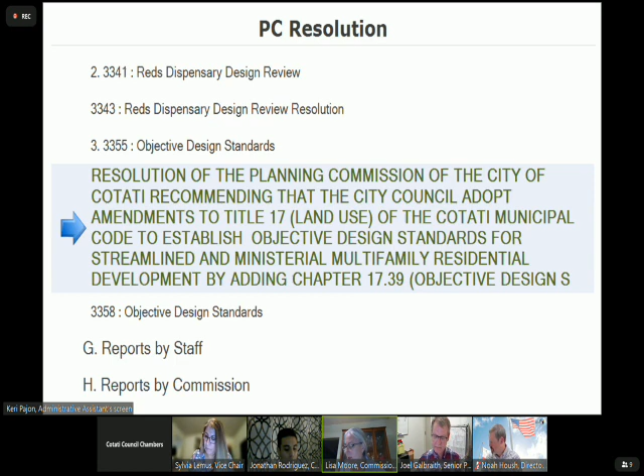And then we'll go to the second resolution. Does someone want to make a motion for the second resolution? I'll make a motion. A resolution of the Planning Commission of the City of Cotati recommending that the City Council adopt the draft document titled Guidelines for the Design of Telecommunications Facilities and Personal Wireless Service Facilities, small cells, located on private and public property and within the public right-of-way. Thank you. Is there a second? I second.

Let's go to a roll call, please. Commissioner Moore, yes. Commissioner Rodriguez, yes. Vice Chair Lemus, yes.